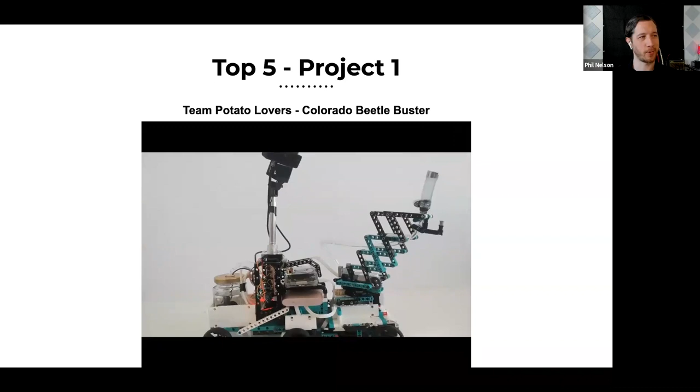Hello all, I'm Marta. And I'm Michał. We are Potato Lovers. Our goal was to significantly reduce the amount of insecticides used to protect potato fields. We'd like to present our project, the Colorado Beetle Buster. Our solution is based on the Lego MVP, which provides us a vehicle with a robotic arm. The Oak D Lite camera is mounted on top of the robot and provides Colorado beetle detection and depth image, which we use to calculate Colorado beetle coordinates. The center of the robot is the Raspberry Pi, which controls the Oak D, Lego hub, and the spray gun. The spray gun is mounted on top of the robotic arm and is supplied by a low-voltage water pump, powered by an electronic circuit designed by us and controlled by the Raspberry Pi.

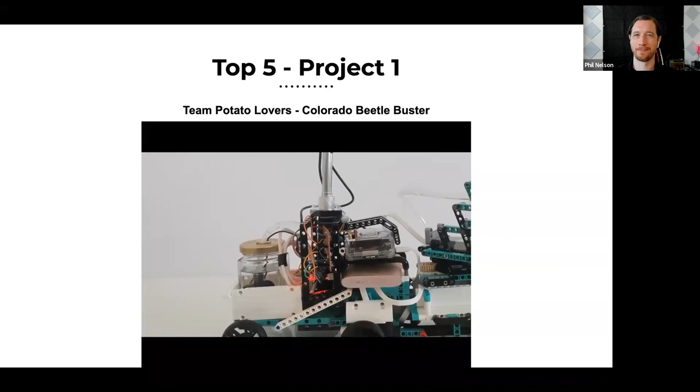I love any time we combine robots and water.

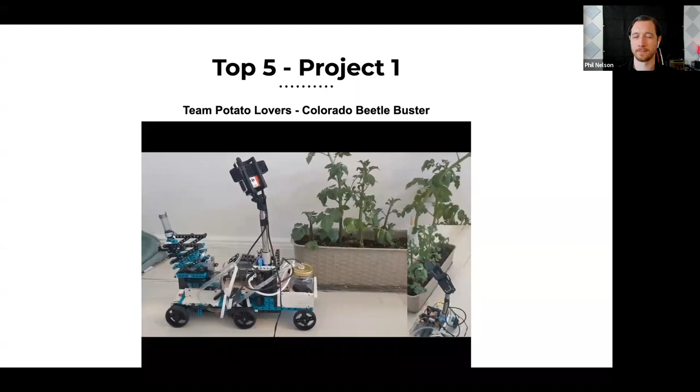I think this is one of the physically largest projects in the contest as well.

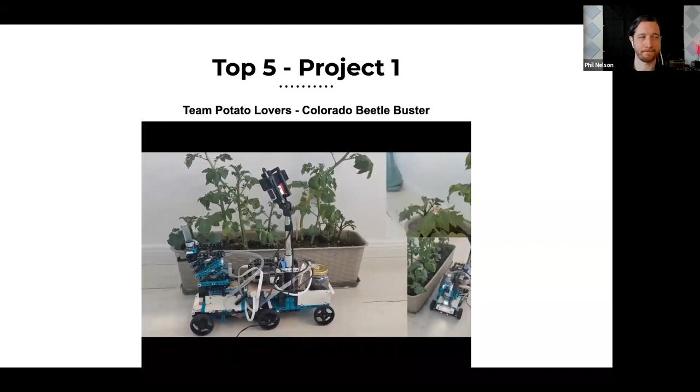It's maybe a bit hard to see there, but the beetle has been found and it's highlighted in red.

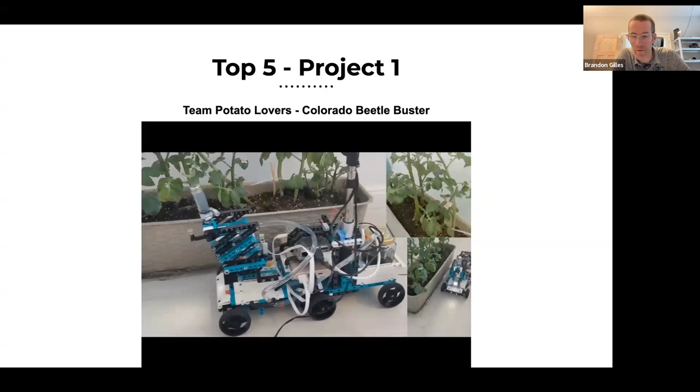And in case it wasn't visible, just the perfect small amount of liquid was sprayed directly on the beetle there.

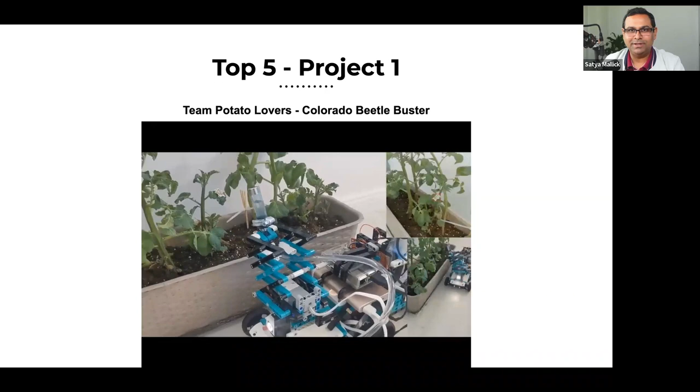Phil, if we click on the video, can it not go on YouTube and play it? I don't want to screw up the Google Slides full screen thing. All right, I've seen it go right, and I've seen it go very wrong before. No, and we also don't want to reveal the... exactly.

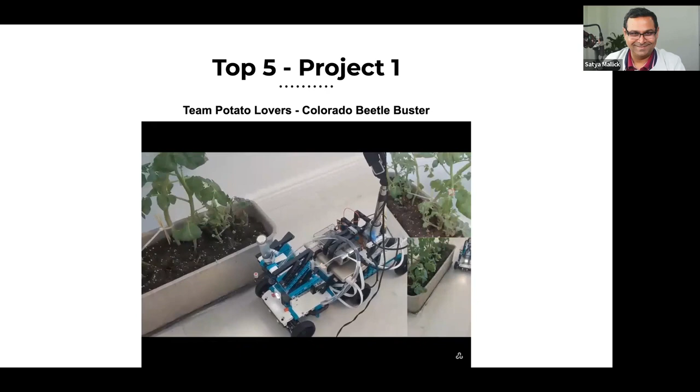Just skip all the way to the end. Skip back, show all the winners on accident. Yes, we got all three beetles there, which is super cool to see.

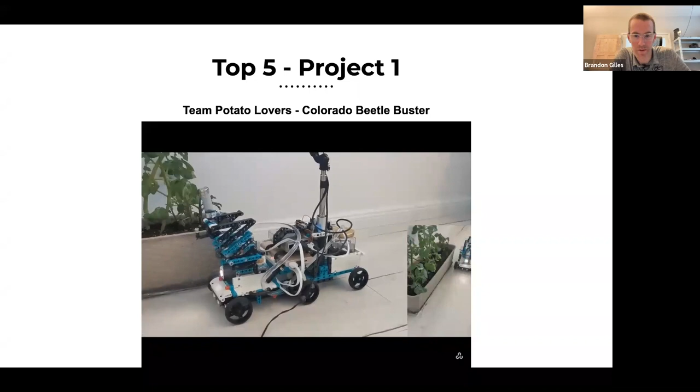And this can be so beneficial to the environment because you're no longer spraying the whole plant. Maybe you're spraying 1% of what you would otherwise, or 0.1%, because it's targeted.

Any thoughts on this project before we move on? I just love it. You know, when I was a kid, my grandma taught me to catch these bugs on the potato fields, and it was super tiring. I didn't like that, and also I don't like bugs. So I'm in love with this project. That's great.

All right, Project 2 in the top 5: Team Wrobotic Elephant with the CV-aided conveyor belt.

Hi, my name is Chris Nogiec from Wrobotic Elephant, and I would like to present a LEGO Mindstorms conveyor belt operated with 2 Luxonis Oak-D Lite cameras. Let's see how it works.

Great sound effects on this video.

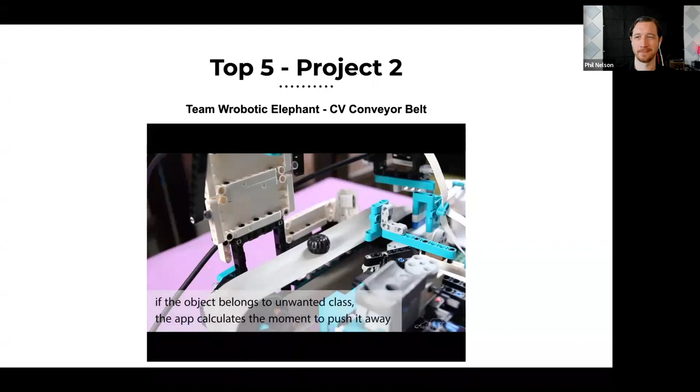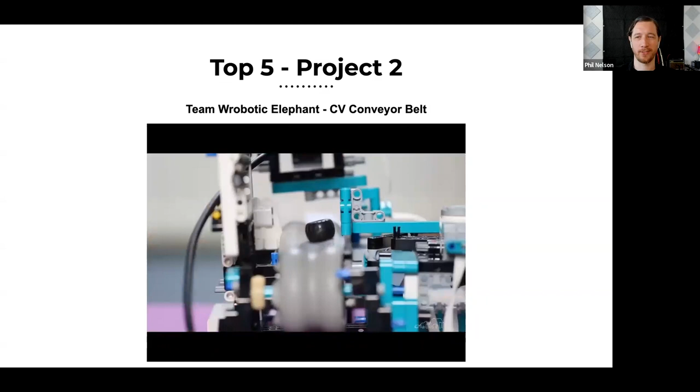I've seen this video 5 or 6 times, and I still smile every time. You know who made it.

Another one of the very cool things here that was a little bit different than the previous contest is people made a lot of ad hoc UIs for control and monitoring, and it was really neat to see.

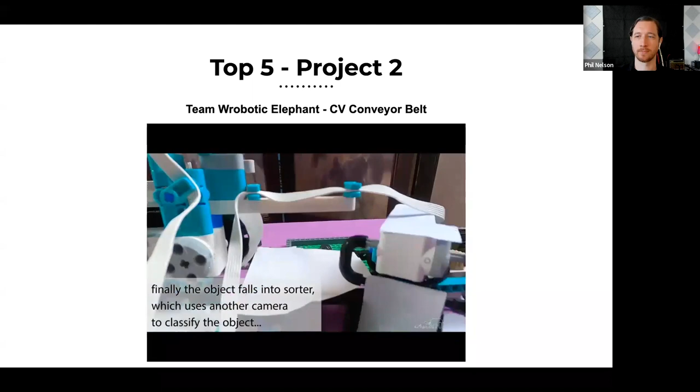So much personality.

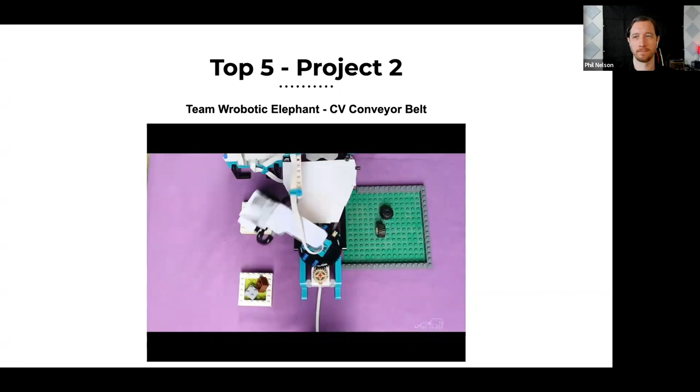All right, thoughts on the computer vision aided conveyor belt? I have one thought, not on the technology, but on the...

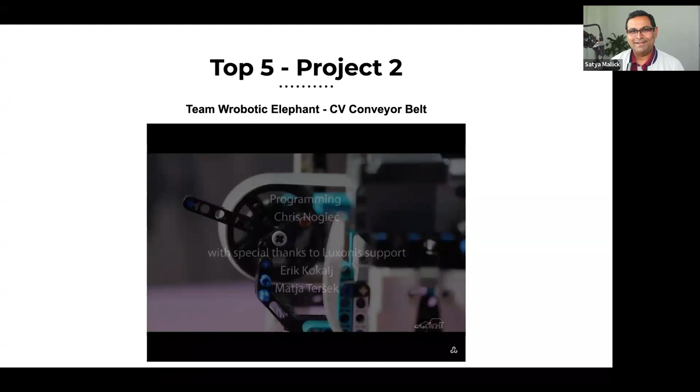So we had several submissions which were very similar in that there was a conveyor belt and there was object classification. But the main thing about this is it boiled down to presentation - among these various submissions, which were technically about the same, how was the final result presented? In competitions, if there is a tie, it will often be resolved by how you feel about the project, the presentation. So that's something I wanted to point out - this is a very good submission, but it was also similar to other submissions we saw. And this stands out because of the excellent presentation.

Yeah, presentation matters. Thoughts, Anna? Yeah, I also wanted to highlight the fact that this is a one-person team. Oh yeah.

I just want to echo what Satya said. When I looked at this submission at the beginning, the first thing that captivated me was the video. The video is really well done, and it conveys exactly what the project wants to accomplish, and it does that really, really well. Then I get to read the project report - it's really well done, everything is laid out properly, all the technical stuff is laid out as well. It's a pleasure to watch the video and read the report. So I think this is what makes this project stand out from the other similar ones.

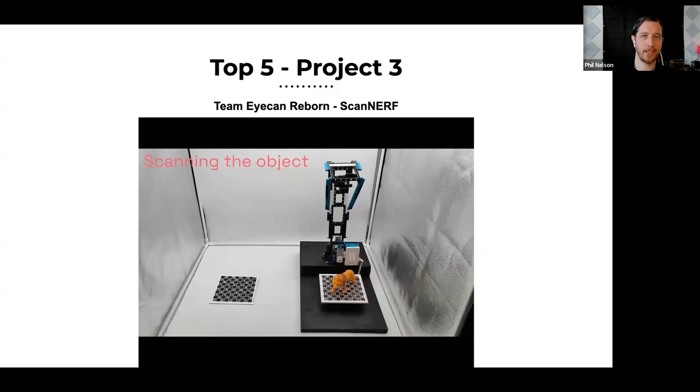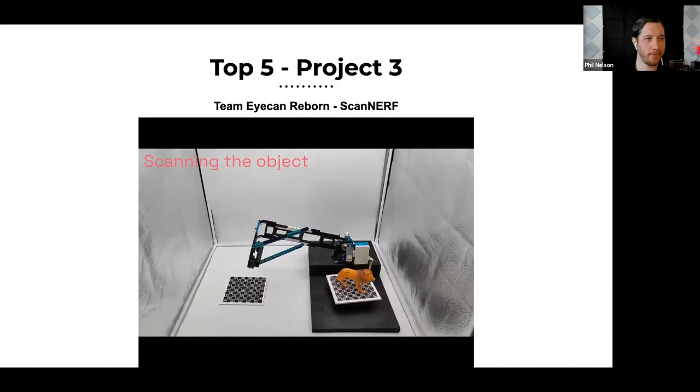Neural radiance fields have been getting a lot of press lately. You've probably seen people posting about them. And you'll notice this is the same Lego set as our previous video, just in a totally different configuration.

All right, excellent demo there.

Satya, what do you think? Well, I think it is one of those teams that know they've done a good job, and they're not even going to say a word about it - just check out the demo, proof is in the pudding, shut up and watch the video. They did not say anything in the video, it's just here's the demo, I'm not going to say anything. So I loved it - the confidence comes through in their project, and the execution is awesome. This is non-trivial to do.

Absolutely, and the video is awesome. They don't use a single word, they don't explain anything, and you know everything there is to know. That's really solid execution - not a word is spoken, yet everything has been communicated. Yeah, definitely.

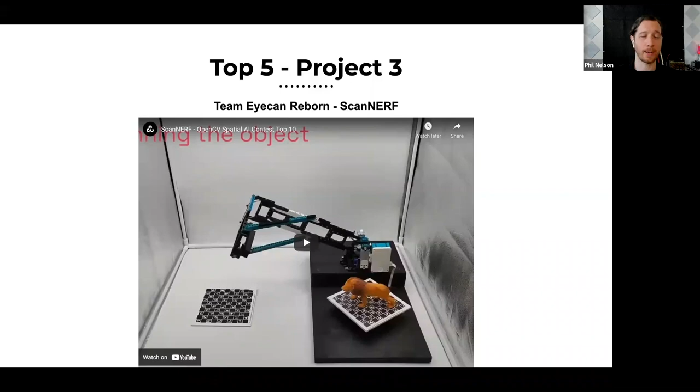Making use of the spatial AI and machine learning power here.

It's going to look so cool when this thing's 50 feet tall, isn't it?

You can see on the right there, they're capturing volumetric video.

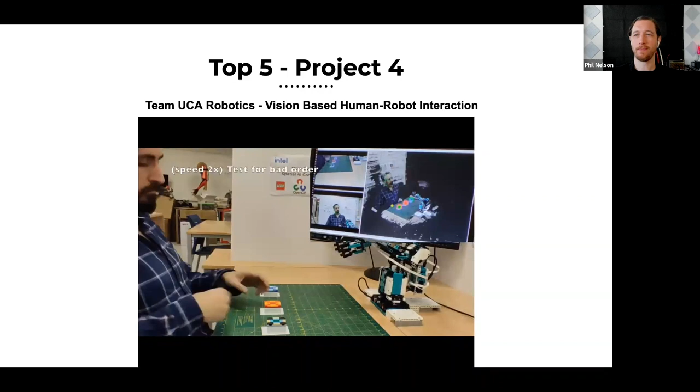Yes, this team definitely accomplished a lot within a short amount of time. Quite a lot of work.

Just a 3-person team. It's quite impressive.

So that was project 4. Thoughts, Satya?

I was very impressed by this as well. They basically used everything, many aspects of the spatial AI camera, and the execution was great. It may not be very clear, but they also had face recognition or face verification implemented in there. The robot will not operate until it is the right operator. And all the demonstration was very good. Overall execution was superb, right? It is, and it's perfect.

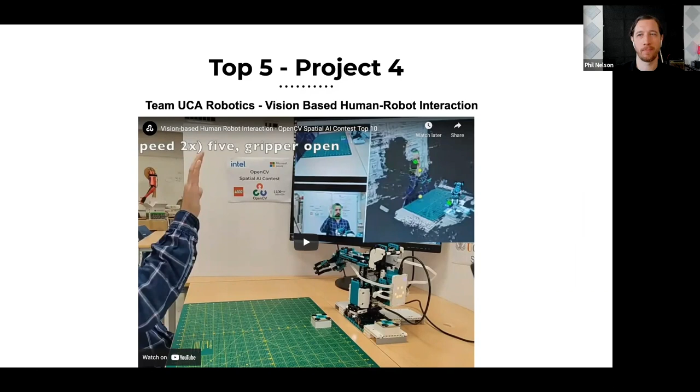All right, the last of the top 5 projects before we announce the winners: Project 5 from Team KiwiBotBuilder, the Agile Packer.

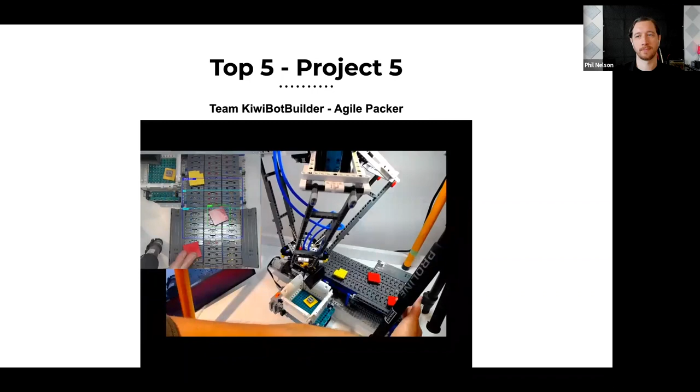One sensor to rule them all. This is another one of the bigger projects in terms of actual size, using this delta arm concept, which is very advanced. I just kind of want one of these to run in the background of my house, just like a lava lamp.

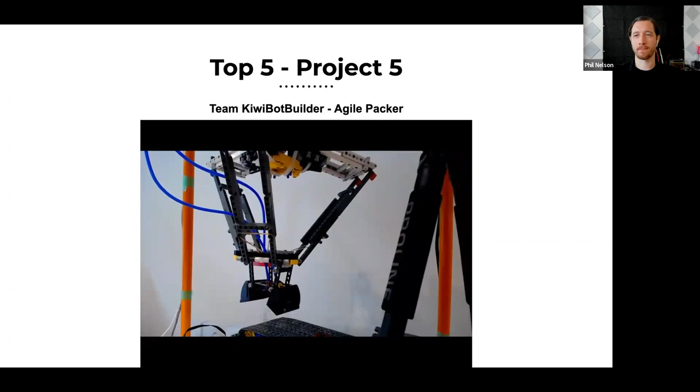Shout out to Microsoft Azure, they used Azure Custom Vision here for this project. One of the very cool things about this one in particular is they didn't just build the last mile infrastructure with the picker, they also built this process to generate the data they needed to classify.

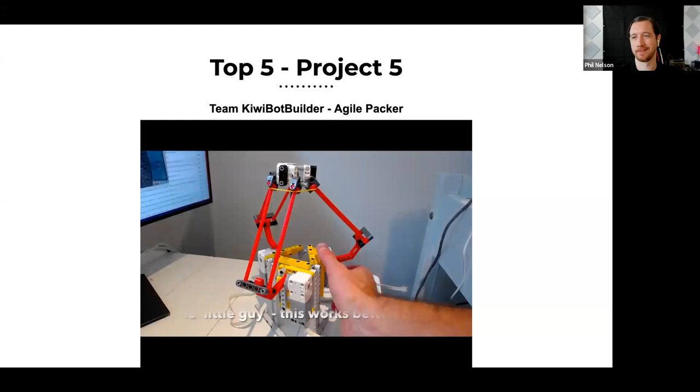And of course, shout out to OpenVino. This was one of the things that was fun to watch on social media, as some teams showed their proof of concepts, or disproof of concepts in some cases, for the early prototypes.

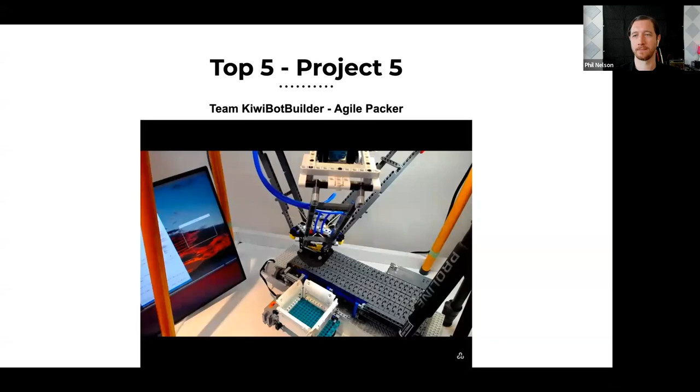All right. So for this one, I think we should hold back commentary because we are hitting... yeah, we're getting up on time. Let's make our big announcements and get our giveaways. Yes, I think we'll have to do that, unfortunately, but great project.